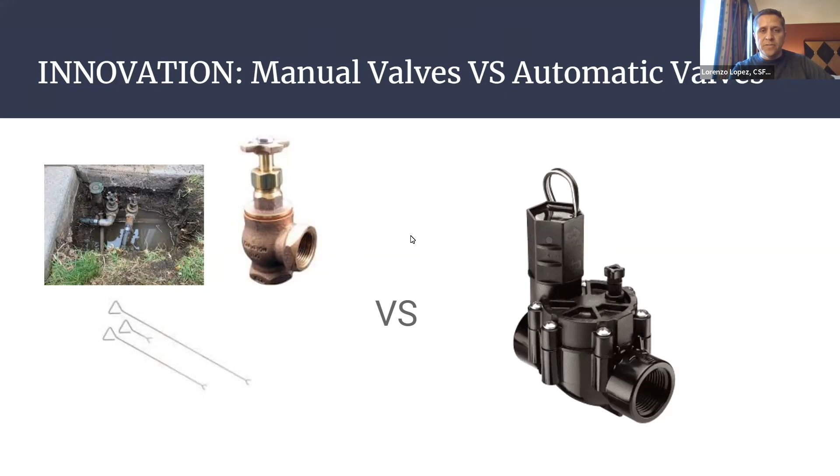Then we all started working with electric valves. We had automatic clocks, and then we were told we're going to switch to master control systems. This really happened to a lot of us here in the last, I'd say, 10 years, where we have master control systems controlling all of our clocks.

It's hard to always just trust a computer or your phone to run it all, but at the same time, when we learn to trust it, it's an amazing thing to be able to take care of all your zones.

Versus, I remember driving around and we'd have to split up into 4 or 5 groups to go turn off those irrigation clocks because it was going to be raining. Then the next day, in the middle of summer, we'd have to go make sure we didn't miss turning any of those clocks back on. So these master control systems are amazing and becoming a big part of your guys' career.

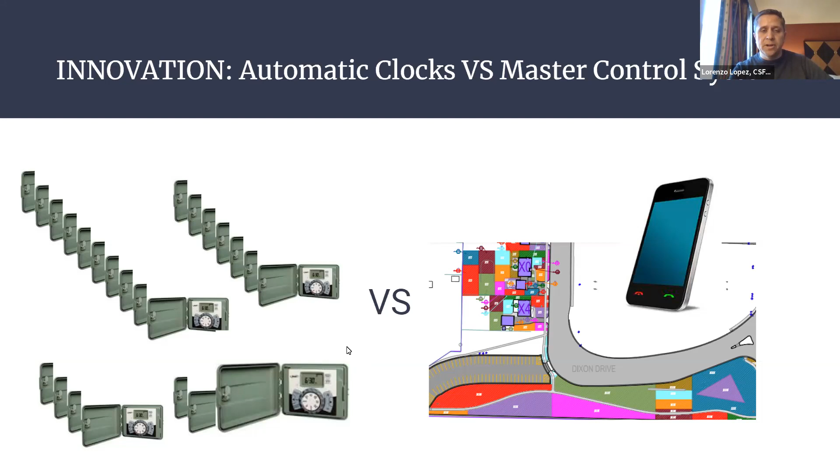Just the same way, those innovations have really helped out a lot. So today we're going to talk about robot line painters and robot mowers. They both have a huge value, not only helping your crew, but also a lot of value to your turf. So we're going to talk a little bit about that today.

We're going to get more into the numbers of it and things to assist you on that side in January in Salt Lake. But for now, we're going to talk a little bit about them and answer some general questions. As I've been going around meeting with guys, they all had questions, and I want to answer some of those basic ones, as well as show you some benefits beyond your crew.

So here are the benefits of a robot mower. You get consistent grass height. Your grass is encouraged to spread horizontally rather than vertically. You get thicker grass, you get the mulching action, you get less clippings, less compacted soils, and less weed pressure.

You get a reduction of exhaust and fuel use. You have less manual labor involved, and it's great if you have people asking you to do social media and public relations, because people love these mowers. There's even one city that's already put googly eyes on it, and everybody loves it. It just adds something different.

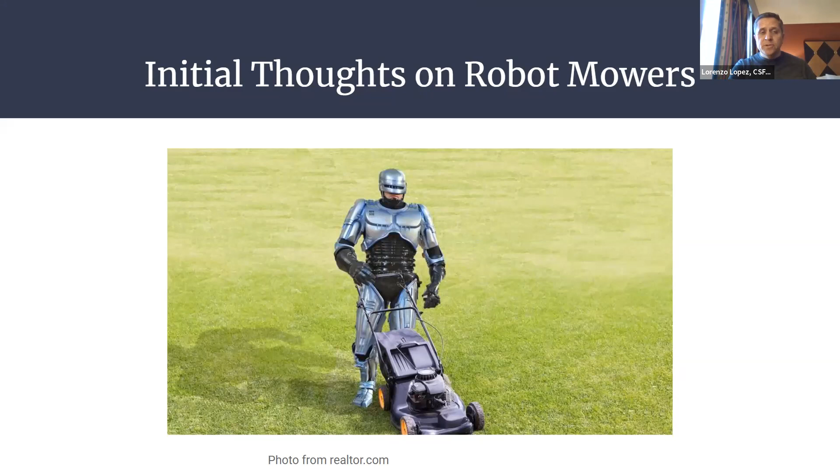When I first got into robot mowers, I thought we were going to have something like this, or just a regular zero-turn mower that drove around and mowed everywhere on its own. That was the initial thought, not really knowing what it was going to be. But what robot mowers really are is something similar to this.

Because you want these batteries to last as long as possible, you need to design them a certain way. We also realized you don't need a seat, because you don't need a 200-pound person on top of it. If you're using batteries, you don't need a gas engine, you don't need a fuel tank, and thinking about it further, you don't need the big spinning rotary blade underneath there either.

This is common because the question I get is, well, how big is this robot mower, and how's it going to finish a job? This is where I'll share that even though these are small, they can take care of quite a bit. Because we've made them smaller, you're also going to see—this is a robot mower flipped over—that there's a disc.

From this disc, because safety is also a question we always get, there are razor blades—quite literally little razor blades underneath this disc—and as it spins, they pop out and cut. But you also see there's a big distance between where the blades come out and the edge of the mower.

So all of these mowers, at least all the ones I've interacted with, have a safety feature where if they're lifted up, they immediately stop, and if they're tilted, they immediately stop. This keeps everything underneath protected as much as possible. Again, you have a good distance there as a safety feature.

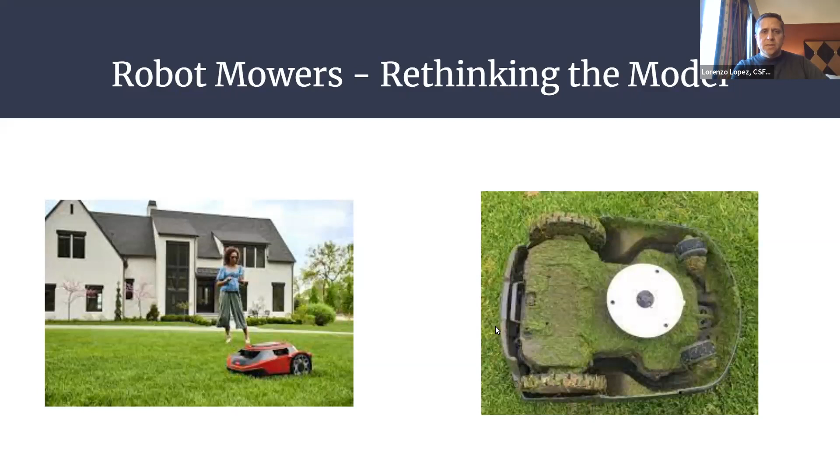Now, how this works kind of helps explain how you get these benefits. So how these mowers get designed out in the field: each mower has a different specification for how much acreage or square footage it will cover, so you'll assign this robot to a section or sections of grass to take care of.

What you'll put out there is a charging system. I think initially people thought the robots were going to be taken out there with you each time, but they don't get taken out with you. What happens is you leave them out there, and when they start to mow and the battery gets low, it goes and parks itself on a charger, recharges itself, and goes back out.

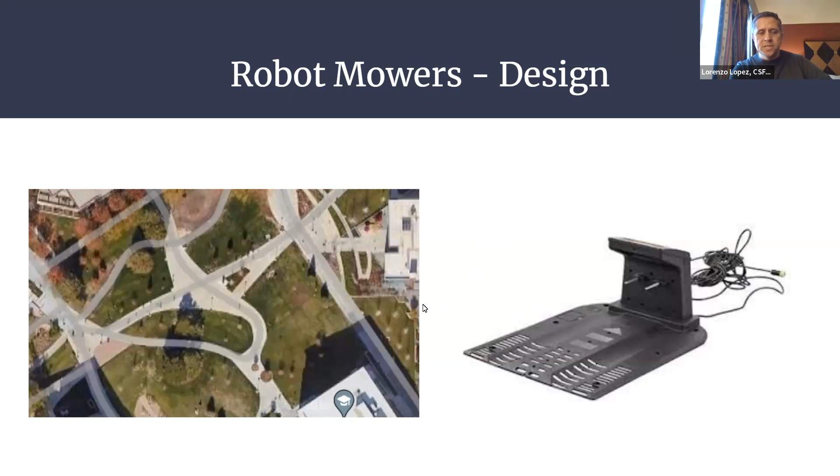This also encourages things. The one thing we do know, and all through STMA conferences the professors are always teaching, is the more often you cut it, the better your grass gets. Sun Devil Stadium, we cut it once a day, and that's what makes it such a good carpet. We've all been to golf courses where we've seen awesome greens and tees where they're mowing 2, 3, 4 times a day, and it's a really tight blanket of grass. So that's our common schedule, but that's extraordinary.

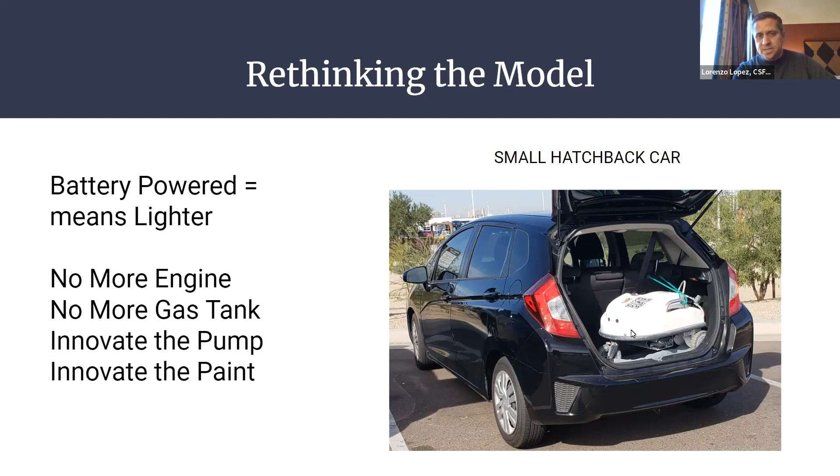So these are familiar parts - they're not bringing us brand new parts to do these things. So now the robot painters are a little bit different. Where the mowers, we left them out in the field, the robot painters will actually stay with you, and you will take them to the site as you need to get them painted.

Inside the robot, we're using pumps that are familiar to us, we're seeing some nozzles that are familiar to us. Even the cradles - these are similar to what a lot of the cradles are that we used on our boom sprayers. These nozzles are similar to TeeJet type nozzles. There have been some innovations, so there's some new nozzles out as well. And then the tablets - they're using tablets that help run the robot, so very, very similar stuff that we're all used to seeing and doing.

And now, because we do have a low pressure pump painting these, we can go do infields. I forgot how much we still are not painting the infields, because those high pressure systems, as you spray down, it just disappears.

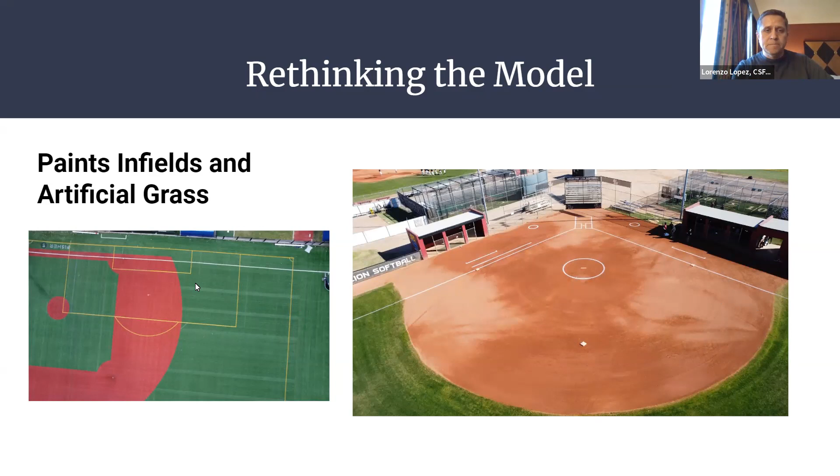And now here's where the real value comes: we now have the ability to shift locations. Why would we not shift locations before? Culturally, why did we only mow once a day? Because culturally, that's all we could do, and it was a lot of stress on us.

Same thing goes for a soccer field. When we move a soccer field, we don't just move one or two lines. You have to move all the lines — all the string for the penalty box, the goal box, the out of bounds, the circles, the arcs, everything has to get moved. So shifting a field 10 feet isn't that simple. We all know we've done things to hide corners or build corners, but...

This is an even simpler way, because the robot doesn't worry about those little landmarks — it will go out and just repaint from the corners. So if I switch, say I have one field painted highlighted in yellow, but if I choose the one right next to it, underneath it in white, it'll still move the mouth of my goal over 5 feet. The best thing is when you actually shift it, the top mouth of those goals will be completely off, so as it wears, I can move it.

As the robot goes out — because paint's still paint, it still lasts 1 to 2 weeks — when it goes back out there every other week, you can just shift that field over another 10 feet and 10 feet. Now we're having less wear and tear.

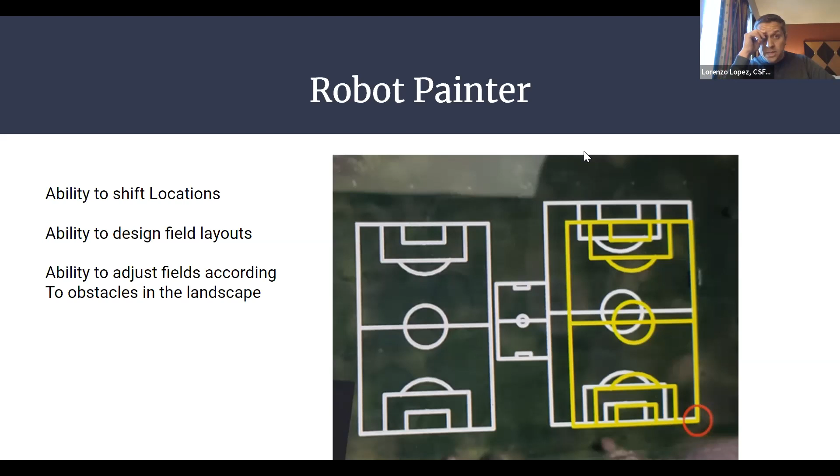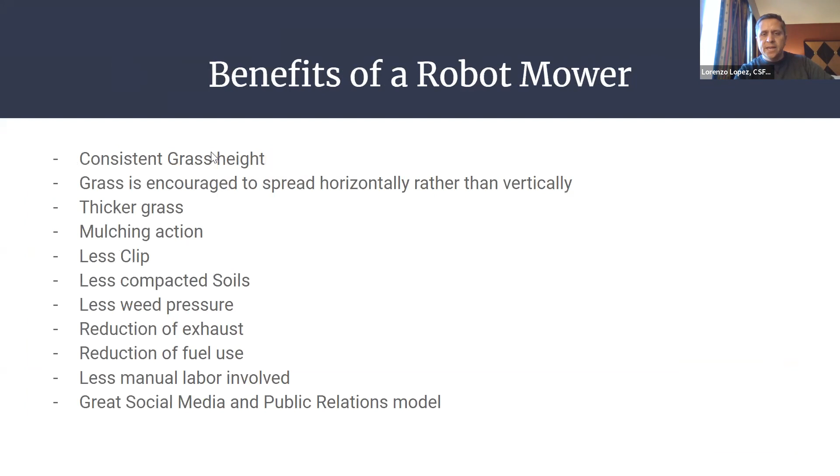What is the square footage mowed per hour per robot? What is the area capacity of each mower? Oh boy, that's a good one. Each robot is built so differently. They have commercial and residential versions, and some can do more than others. It depends, so it's good to know your situation and we work it out. There's quite a few options, and there's even ways to link a few robots together to cover the same sports field. There's really great answers for sports fields right now, especially since a lot of sports fields are fenced off and flat, so it's a really good scenario. Robot mowers also have kits to do a lower cutting height.

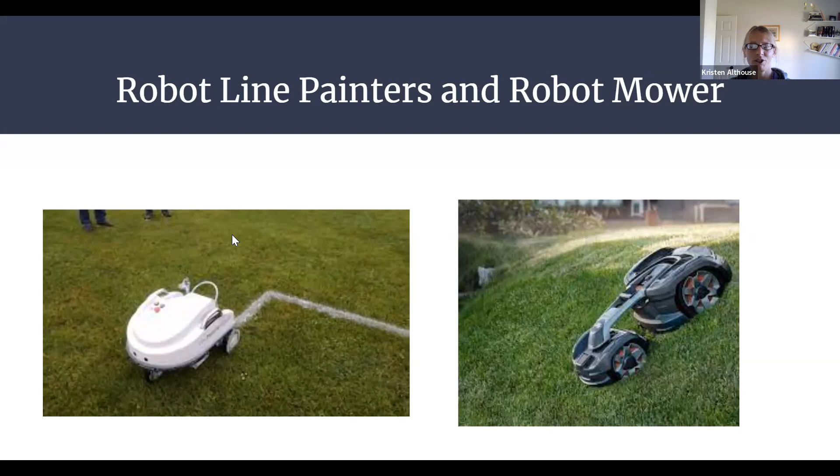What is the blade maintenance on these machines? Depends on the grass you're in - that's probably the biggest thing, but you're looking usually to replace them every 3 to 6 weeks. Like I said, they're razor blades with a screwdriver, and the batteries are still batteries - protect them in the winter. They're kind of like most batteries; if you can keep them out of the cold, at least bring them in for the winter, they tend to last a lot longer. But a few years generally you'll get for sure with these batteries.

Can a robot mower stripe a pattern in a ball field? I don't think it could do a pattern necessarily - when you say a ball field, are you talking about the outfield of grass? I'm thinking outfield, so let's leave out the infield. There are now mowers that are going to be able to do patterns, so we can start to do different patterns in those ball fields. Outfield, yep, perfect, we can - there are mowers coming out that can stripe patterns in ball fields. Yep, it's pretty good.

Rear roller - it's more on the mow pattern right now. I don't believe they have rear rollers on them as of right now. That's a good question for me to have answered, but yeah, if you drag something, it'll definitely make more of a line for sure.